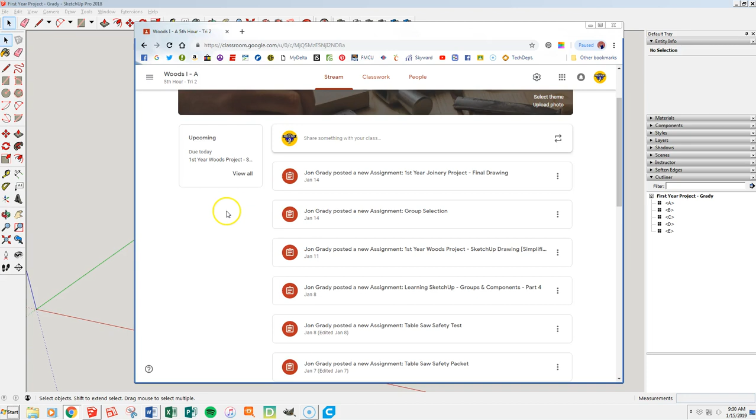So that's where we should be from the simplified version. Now, how do we go from this to the final version? Okay, so I'm going to switch back to my window that shows our 5th hour classroom here, and I redid this assignment for the final thing so that it popped up at the top of your stream.

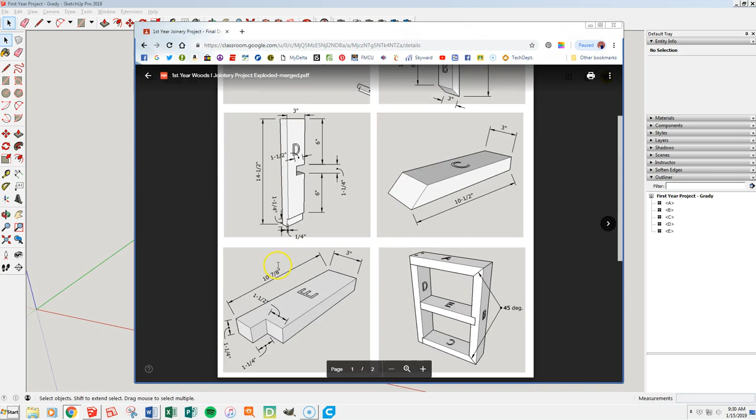So if I now click on this, here's your assignment that we've kind of talked about. I'm going to open up the PDF that gives me the dimensions that we need to make our pieces. So I'm going to start with A, and we need to put a little bit of an angle here.

So now let's go back to our drawing. The only change I need to make is that angle. So in order to change a component, I have to double click it so that it opens up like this.

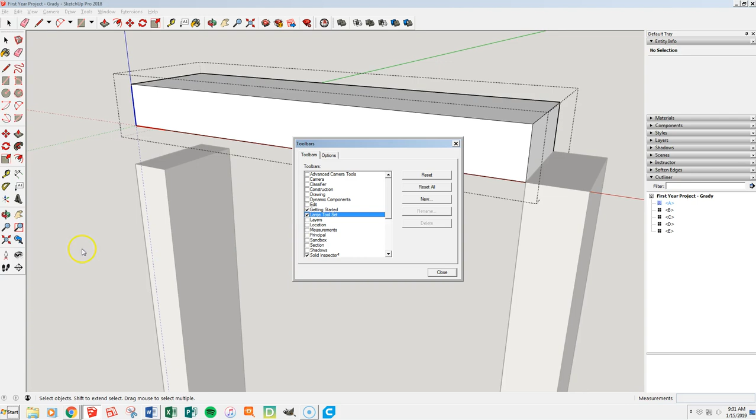And then you need to have your large tool set here. If you don't have this, we go up to View, Toolbars, and where it says Large Tool Set, you need to have this box checked. We want that checked so that these tools are on the left-hand side of your screen.

And then we have what's called the Protractor tool. We want to position our Protractor tool so that it's on that corner, facing green, okay? And right now it's telling me that I need to, if I look at the bottom, align the bottom of a protractor just like I would in real life.

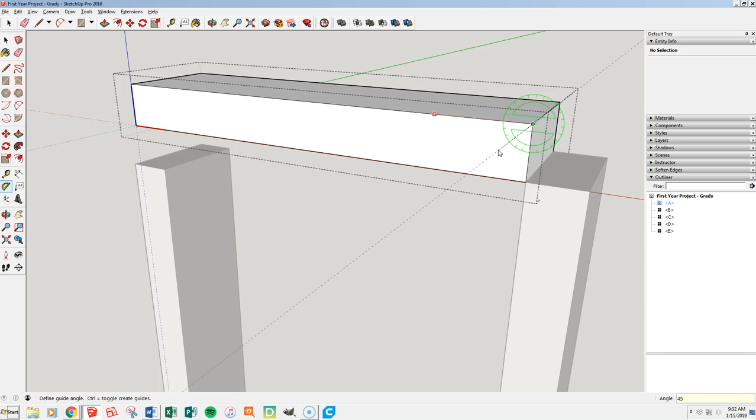So I'm going to align my bottom protractor. I already clicked in this corner. I'm going to align the bottom now by clicking there. And now it says to define my guide angle, which is going to be 45 degrees. So I hit 45 on my keyboard and then enter, and it gives me a guideline at 45 degrees.

And now there's a couple of ways to do this. You can do either one that you prefer. I can come in here with the line tool, make that a real line, and pull the corner out of there, and now I have my 45 degree piece.

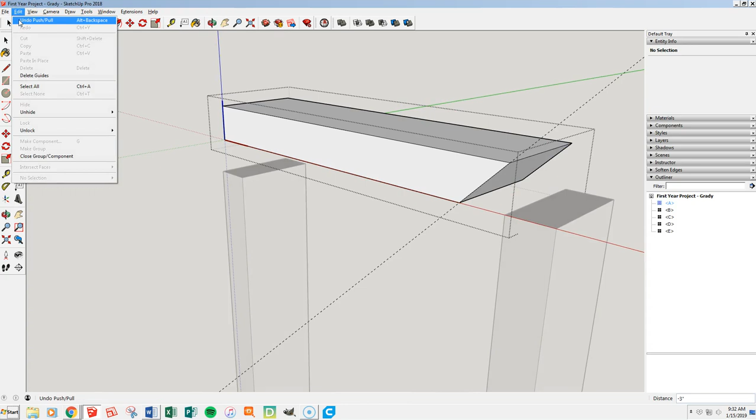The other way to do that is, and I'm going to step back a few times, undo that, undo my line, is to actually take my selector tool, grab this line, which you can't really see that I have it selected. There you can a little bit, I guess. And then I'm going to move it.

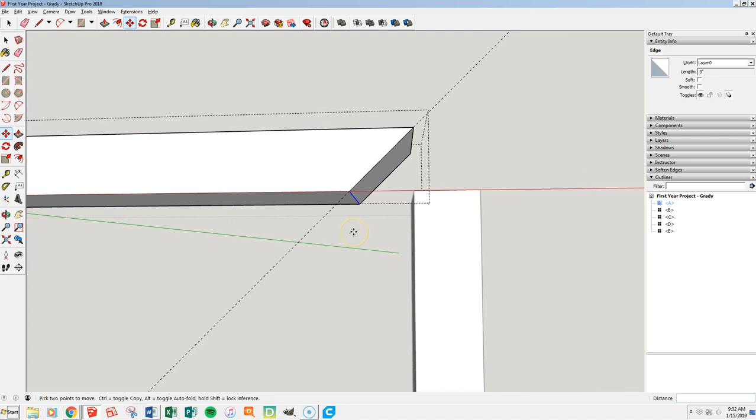So then I switch to my move tool, grab that, and I'm going to slide back the red axis until it hits that line. And now I'm at 45 degrees as well. Okay, then we'll get our eraser tool and get rid of that guideline, and now part A has been changed.

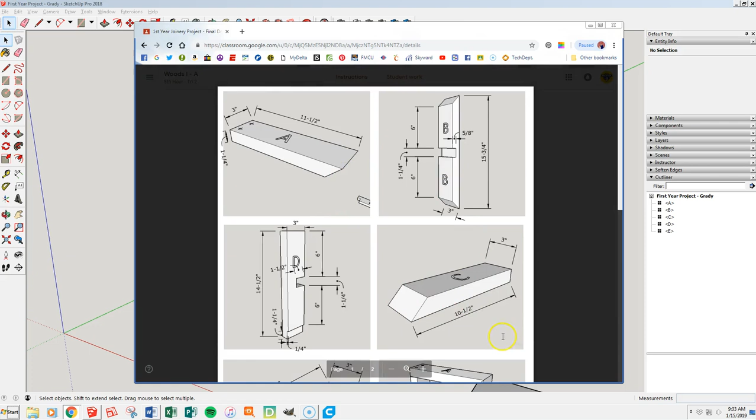So if I go back and look at this, part A is done. So now let's, I'll let you do part C on your own. It's basically the exact same process. You just make the angle down here.

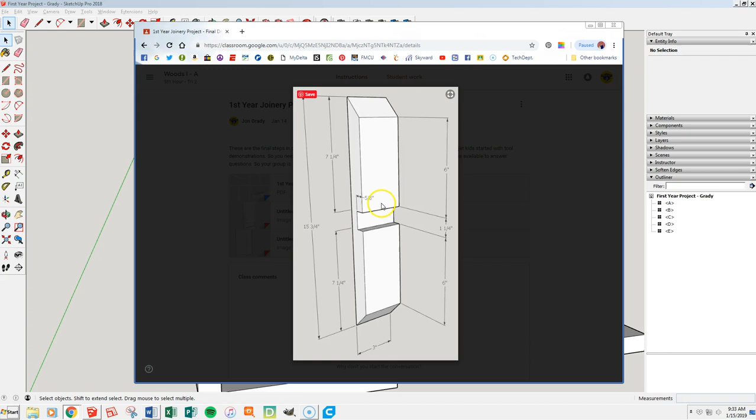So there are several ways to do this. I'm just going to go through the easiest one, and I'm going to do this fast. You already know how to make your 45 degree angles, so I'm just going to go through those quick. Click once in the center, click there, 45, enter. And I'm going to use the line tool for these.

Pull the corners out, double click to remember it, and erase the guidelines. Okay, my corners are done.

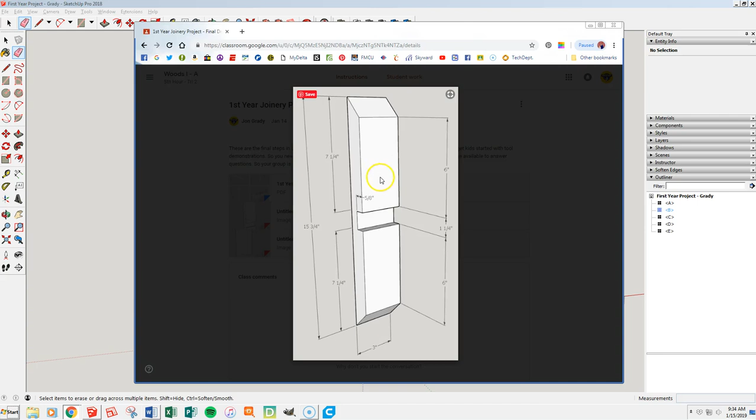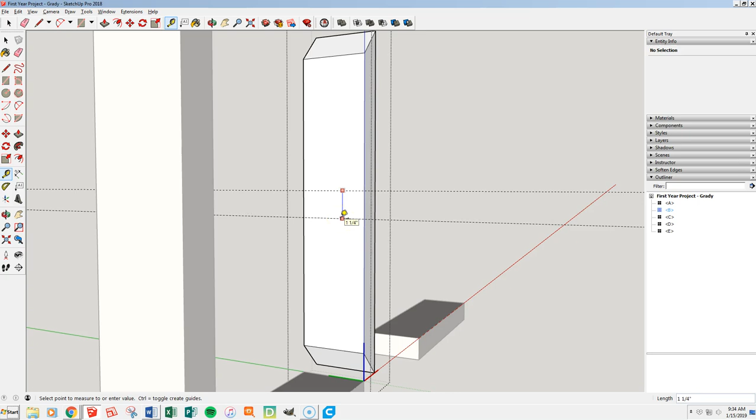So now let's get here. I can go 6 inches in from these new lines. Using the tape measure tool, I'll line up parallel, 6, enter, 6, enter, and we should have 1.25 inches from here to here. And we do, that's what we want to see.

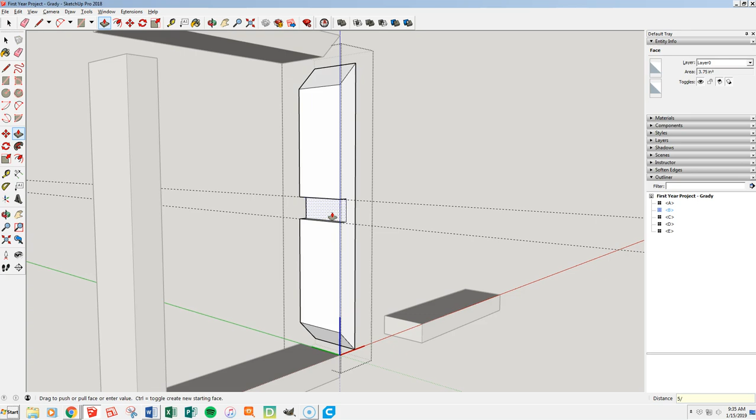So now I'm going to make a rectangle that goes from intersection to intersection. How deep do we have to push that? Right there it says 5/8 of an inch. Come back here, grab my push-pull tool, 5/8, there's 5/8 of an inch. Erase my guide tools. Part B is done.

Remember, I'm going to let you do C on your own. Let's take a look at part D.

Here is part D. You could look at this as well for part D if you want. I just kind of prefer the zoomed in view here with some more dimensions. So let's start on the bottom, okay?

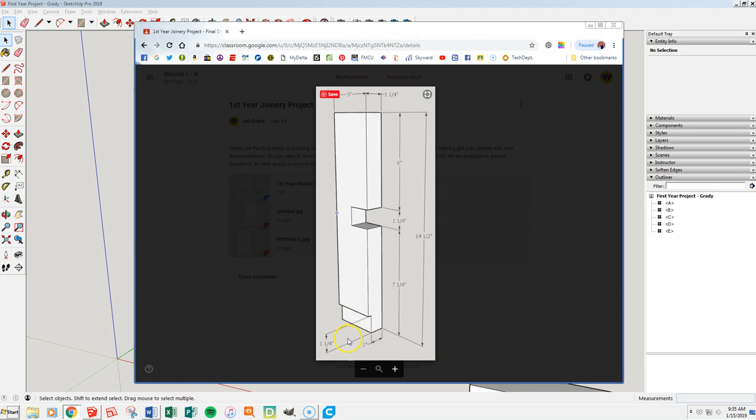We have a rectangle that's 1.25 inches going all the way across, and it gets pushed in. It doesn't say it on this drawing, but here we can see this number right there. It says 1/4 inch. So I double click it to be able to edit it.

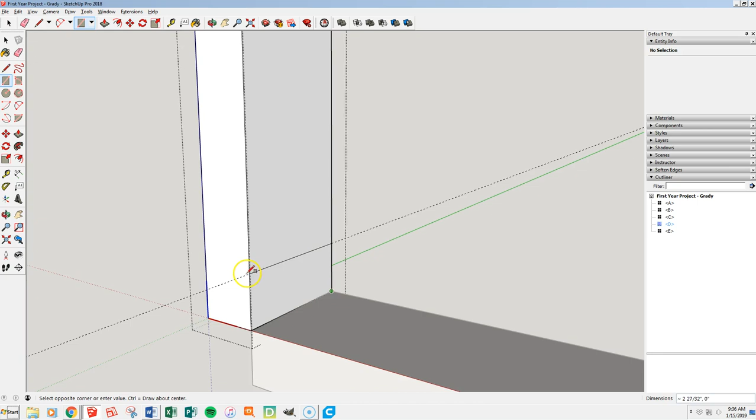Let's do a tape measure tool, up 1.25, a rectangle tool to that new line. So that then was from 3 to 1.25 inches. And I'm going to push-pull that in 0.25. Get rid of my guideline. That part's done.

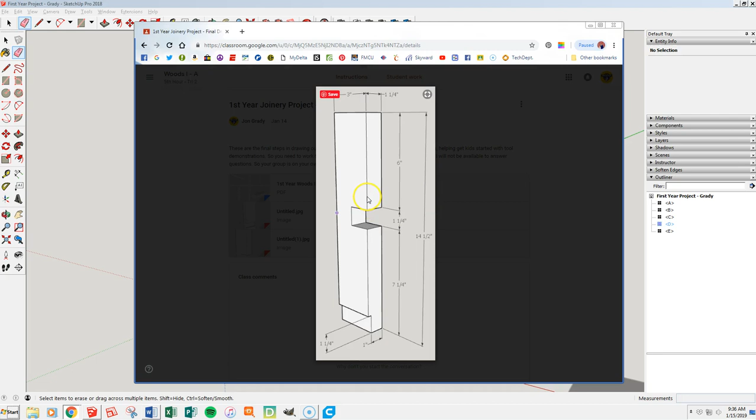And now let's go to our zoomed in view here. We have 1.25 inches cut out, and it's going to go half exactly to the middle of this. And if the full width of this piece is 3 inches, to get to the middle right here is going to be 1.5 inches, so 6 inches down from the top.

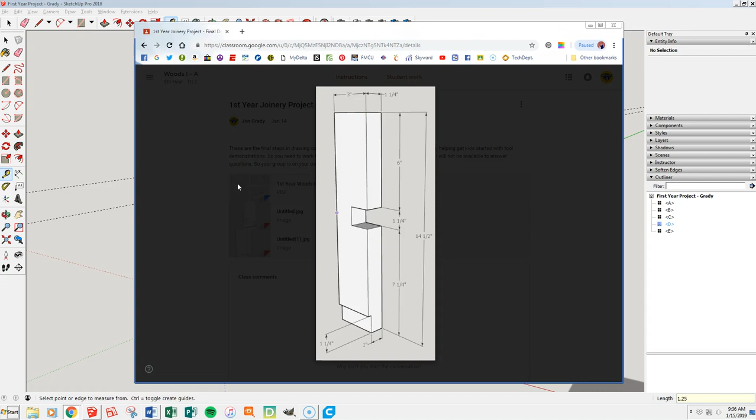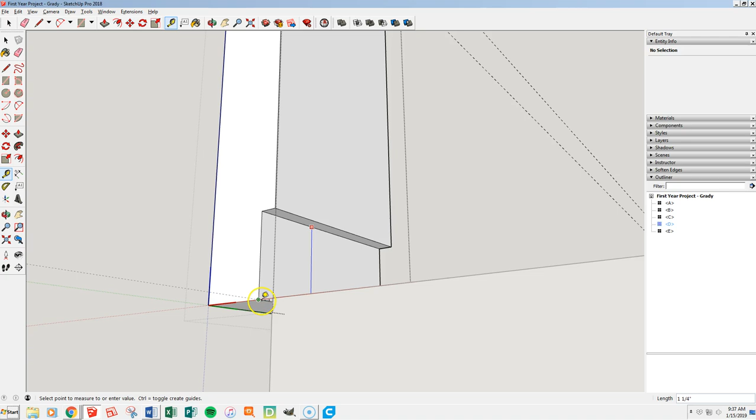Then 1.25 inches, and we should be left with 7.25 inches all the way to the bottom. Let's check to see that we are. So to there is 6, and we already know that from here to here is 1.25 inches. Add those up, 7.25 inches, and we are at our number right there.

Okay, so now it gets a little bit, not necessarily tricky, but again this is on the back side of that. So let's look at this. It comes off the back, this corner that we're going to cut out.

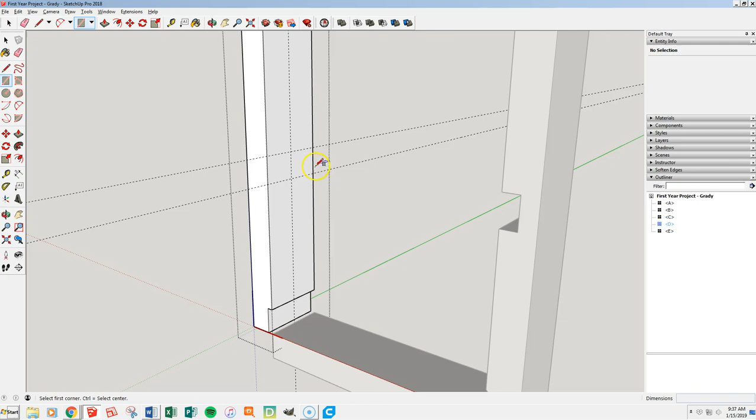So what we're going to do now is come in here exactly half, so that's 1.5. Fill that in with a rectangle, and I'm going to push-pull it to this back edge so that it comes out of there. Then I'm going to delete all of my guidelines with my eraser tool. And now part D is edited, right?

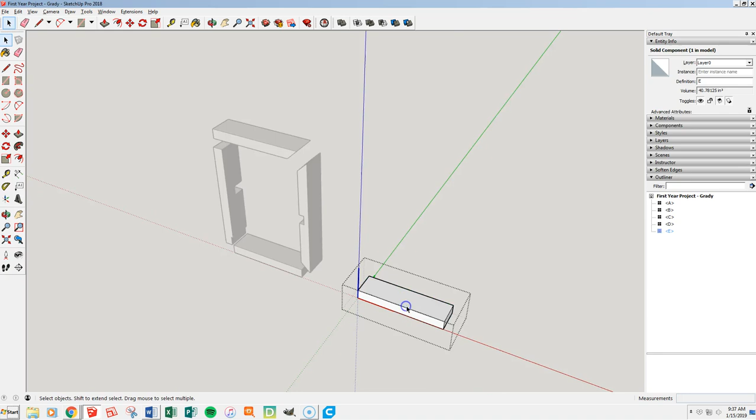And the last thing I need to do is change this one, and we're going to do that in a very similar way. We come in 1.25 inches here, okay, so that accounts for the thickness of this piece. And then we want to go to half again this way, so 1.5 this way. And now to have this fit in here, I actually want to take out this front corner.

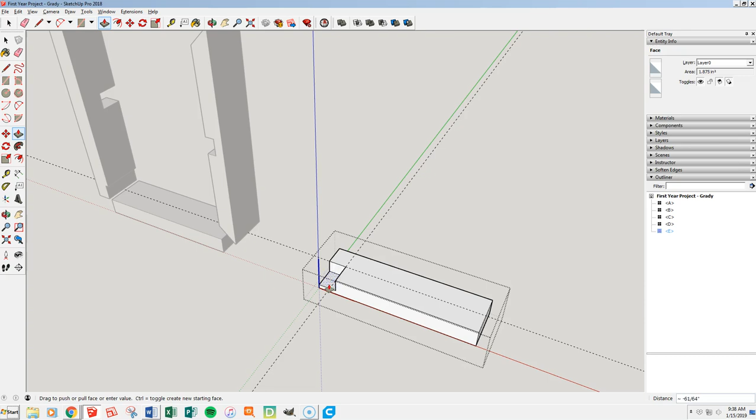So then I'm just going to fill that in, push-pull that rectangle out. There's that piece. Let's erase our guidelines, close our part. Okay, and so now we're ready to kind of put this together here.

And you already did this on your own, I think. Whoops, I missed there with my line, got to make sure I get that intersection.

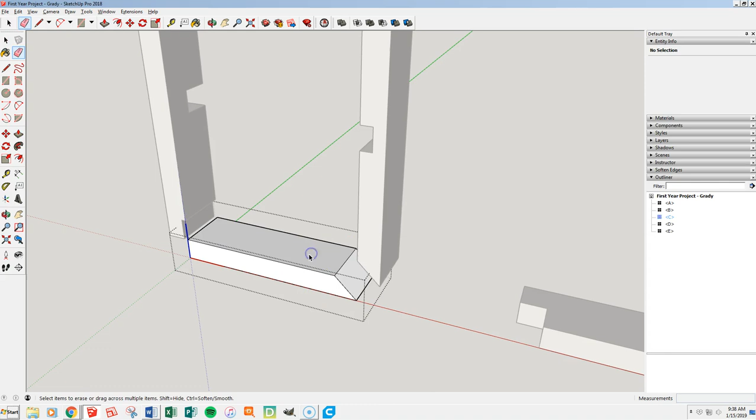Now, moving things together, you can move any part you want first, but I want these to come together. The only tricky thing about moving parts, and I select it first, I get my move tool, is think about which points you want to come together. This point is going to touch this point.

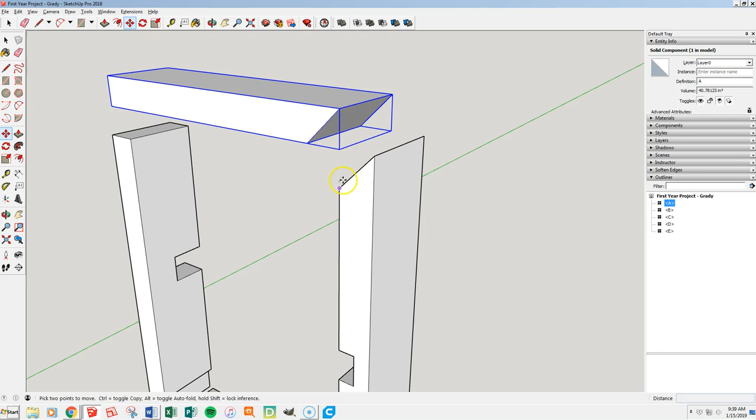Or think about this point coming together with this point. So however I move it, I just want to make sure I select it right on the point that I want to come together with this. And I might have to do a little bit of wiggling to get it to kind of intersect with part B. So there's those, come together now.

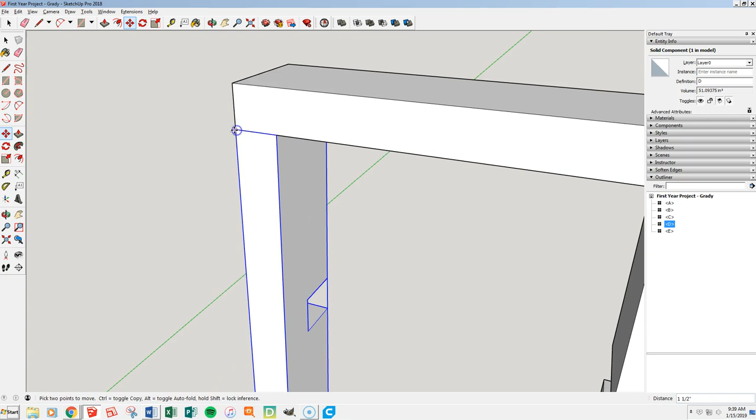Now I can move this one. And in this case, this corner out here is going to come together with this corner here. So I select it by that, I'm going to slide it in and make sure everything's coming together nicely. And now, same thing as I did before, I'm going to grab it by this corner so that it recognizes that corner, and everything's coming together real nice.

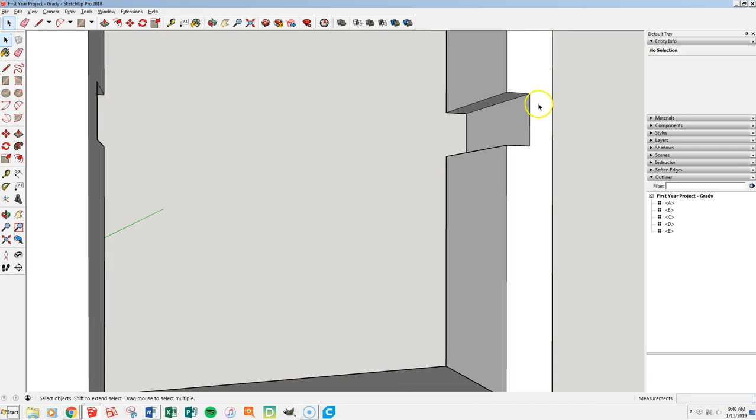And then let's move this one. This one's a little bit trickier still. So if I think about this piece, right here in this corner, right there, is where that corner is going to go. So I select it by that corner and move it in place till it goes to that first corner I looked at. And now everything has come together and I am all set.

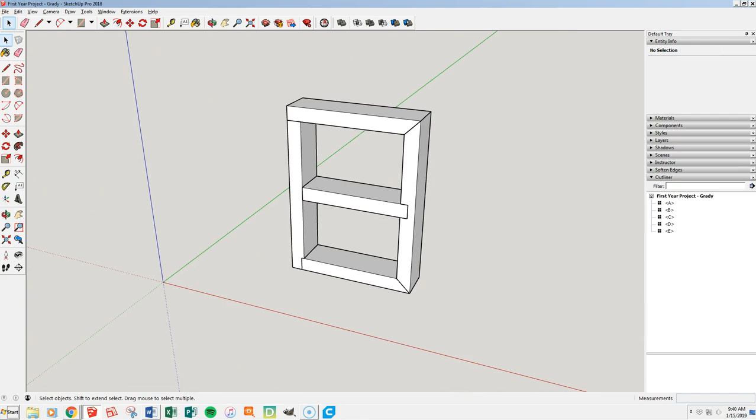So then I would go up here, File, Save to update it, and I'm good to go.